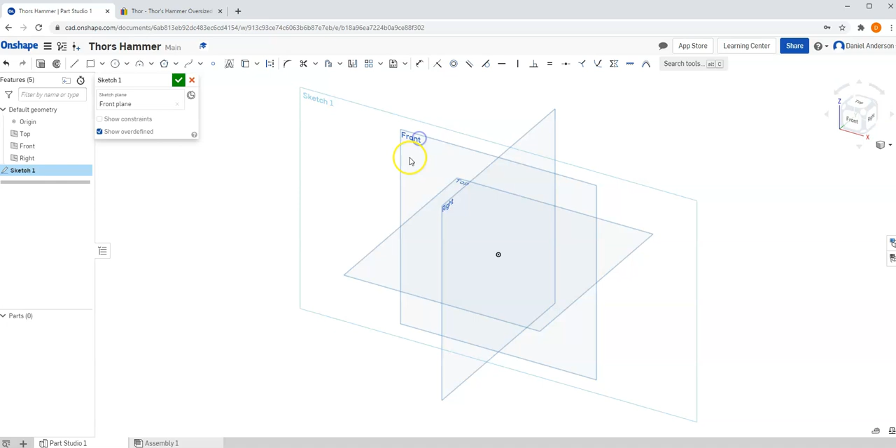And once it's open, let's go to Sketch on our front view. We'll go to our front view, grab your rectangle tool. I'm going to click on the origin and I'm going to zoom pretty far out here because I want this to be a pretty big rectangle. I want the height over here, the top to bottom, to be more than 6 inches, and I want the width to be more than 10 before I click.

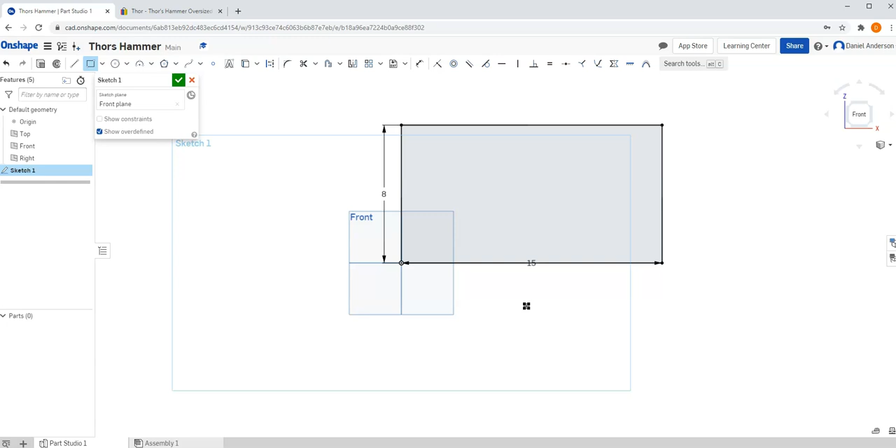And it's asking me for the width, and so I'm going to type in 15 inches. Hit enter, and now it asks me for the height. I'm going to type in 8 inches and hit enter. And you can always go in and add the dimensions after the fact if you missed them in the beginning when you were typing them in.

But once you have your rectangle sketched, go to Finish Sketch, go to your home view, hit Extrude, and let's extrude this rectangle out 8 inches. Hit OK. And now you can see we sort of have the general outline of this hammer, but you'll notice that it has these slants on the corners. These slants are called chamfers, and what they do is they sort of flatten out or slant a sharp edge.

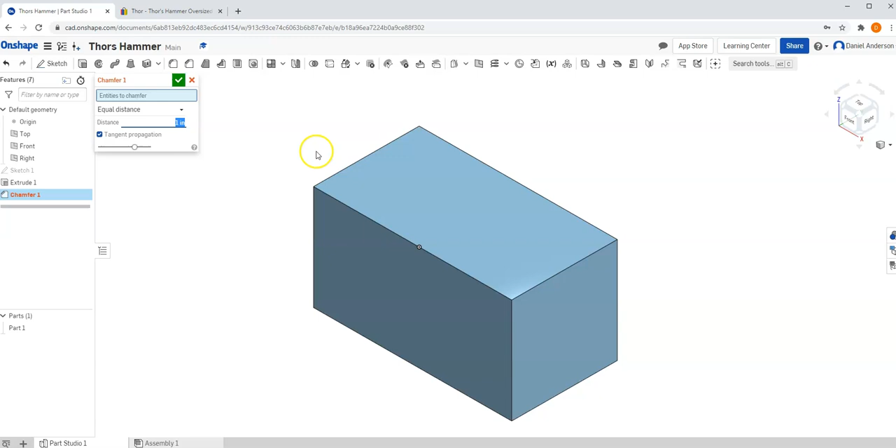And so if we look in our toolbar, we can find the chamfer tool. It's right here. If you click on it, we can tell it to be a distance of 1 inch and hit enter. And I want to click on these 4 outer corners. And so I'm going to click on this corner and this corner, and I'm going to turn it around to the other view to get this 4th corner. Hit OK. But if we look, there are more slants right here on these edges.

And so if we go in, well, actually, if I look, I'll notice that these slants are actually a little bit bigger than these ones. And so I'll make these chamfers even bigger. So I'll click on my chamfer tool again. And this time I'm going to tell it to be 1.5 inches. And I'm going to click on these 4 corners on this side. So this one, 2, this one over here is 3, and this one over here is 4.

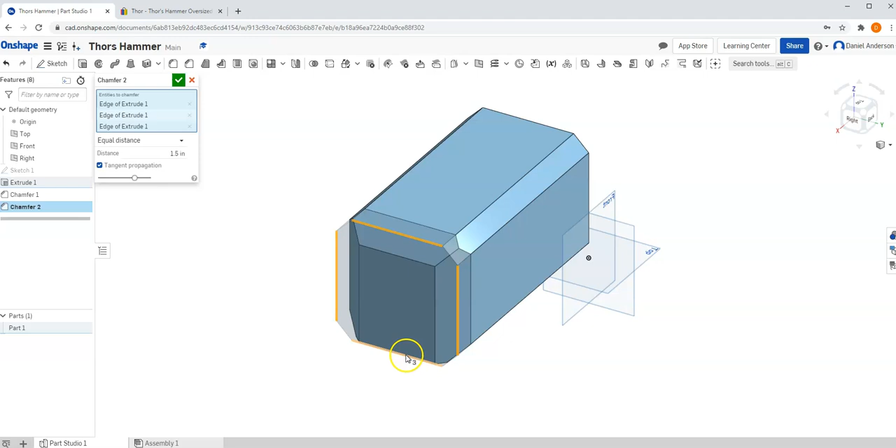But if you look, it's the exact same on the opposite end. It's sort of a mirror image, and so we can go to the other side. So we'll change our view all the way over here, and we'll do the same thing on these 4 edges. So that's 5, 6, and if you're wondering where I'm getting this, where it says 5 plus, it counts for you how many you have down. And so this is the 8th. We've got all 8 of these corners done.

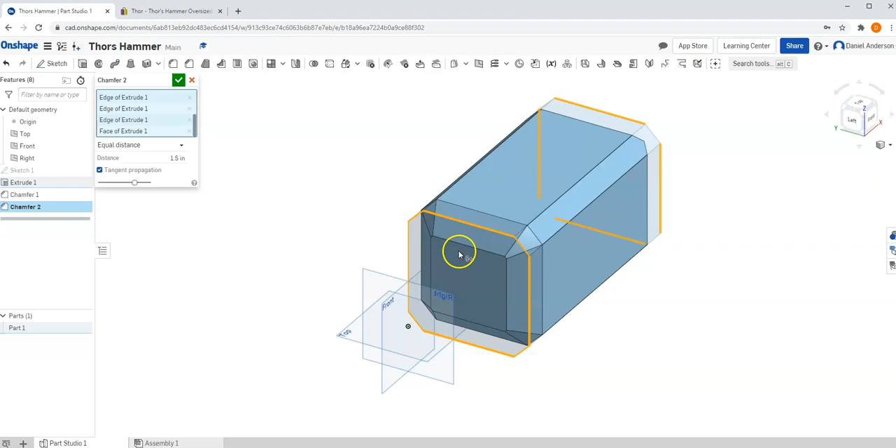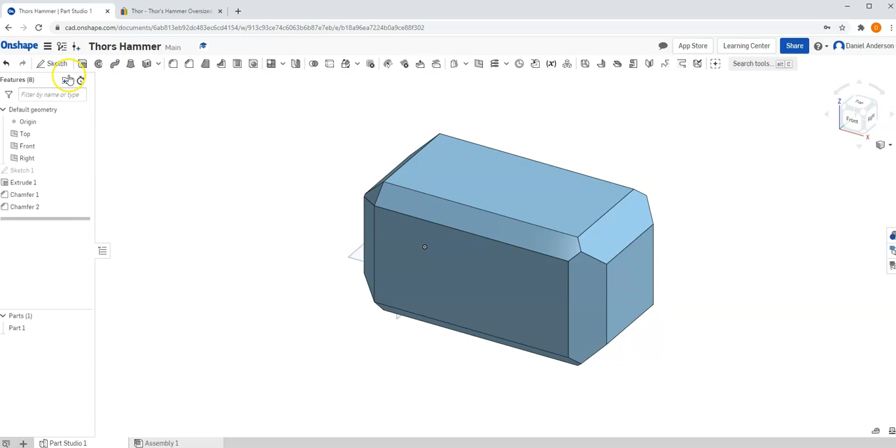I'm going to hit finish, and now you can kind of see how we have this sort of general outline of Thor's hammer. We need to add this circle right here, and we need to add this handle. And so I'll start with this handle right here. I'll put it on this top face. So let's hit sketch and then click on this face. And then let's change our view so we can see what we're looking at here.

And I'm going to grab my circle tool. And I'm just going to put it down somewhere in the center. And click. And I'm going to give this circle a diameter of 1.2 inches. And I want to center this circle. And to center it, I'm going to use dimensions. And you may recall the entire depth was 8 inches.

And so I'm going to click on the center of my circle, and I'm going to go not to this line right here, but to this outer line, this bottommost line. I'm going to click, and I'm going to drag and click again. I'm going to tell this to be half of 8, which is 4 inches.

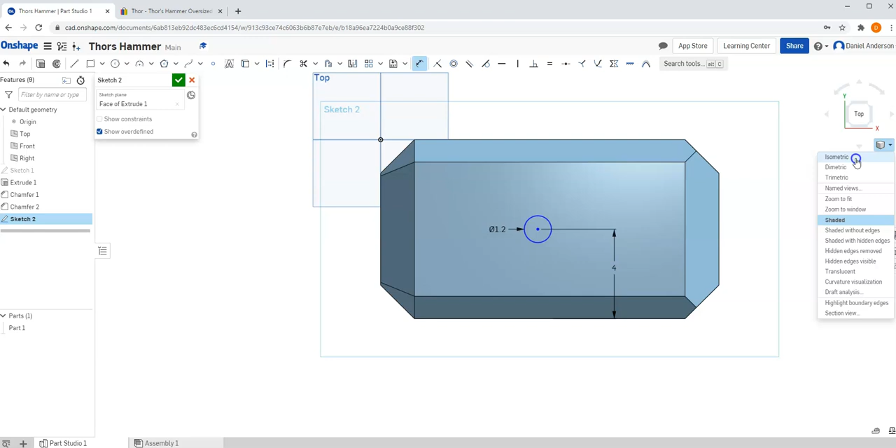And if you're wondering why I went to this line instead of this one, if I go to my home view, you can see this was the edge that we actually measured from end to end. This is 1 inch closer. We would have had to do math to center it from this edge.

So it saved us a little bit of math to not measure it from this edge, but rather the original edge before the chamfer. And so if I go back to my top view, we can do the same thing. Don't go to this edge, go to the outermost edge. We'll click here and click on the center of our circle. And this time it's going to be, if you recall, the width was 15 inches from end to end. And so we're going to do half of that.

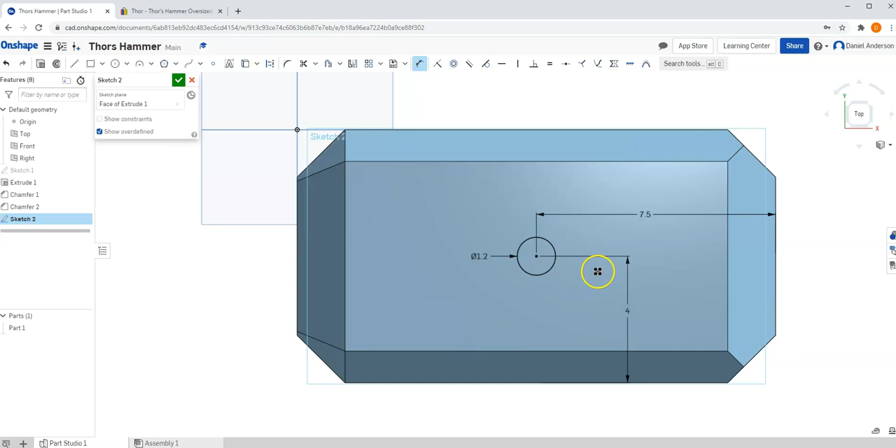And if you're bad at math, Onshape will actually do it for you if you type in 15 divided by 2 and hit enter. And it'll figure it out. It turns out half of 15 is 7.5. And so now I have a fully centered circle. I'm going to go ahead and finish my sketch and go to my isometric view.

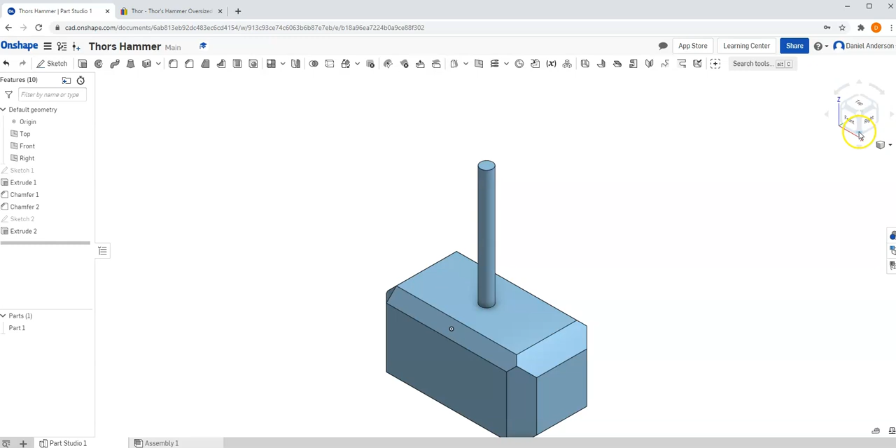And I'm going to extrude this circle. And let's extrude it 12 inches. Hit enter. And OK. And there we go. We have that handle. And so now all we need to do is add these circles on the other end. And so we need to go to the other end of our shape. I'll change my view in my view cube.

And so I want to start a sketch on this face. And if I look at it from the bottom, we can start working. I'm going to grab my circle tool, but instead of measuring it and centering it, I'm going to show you a new trick. So let me actually change the view back to isometric. And instead of drawing a circle, I'm going to find my project geometry feature. I'm going to select it, and I'm going to click on this centered circle that we drew before.

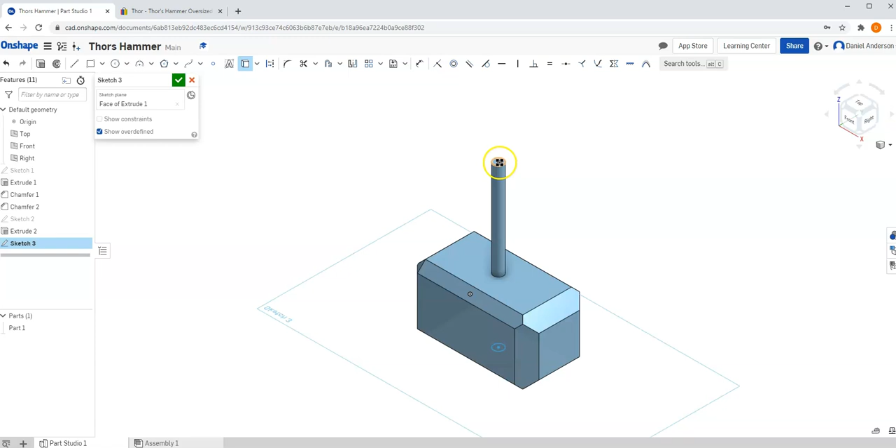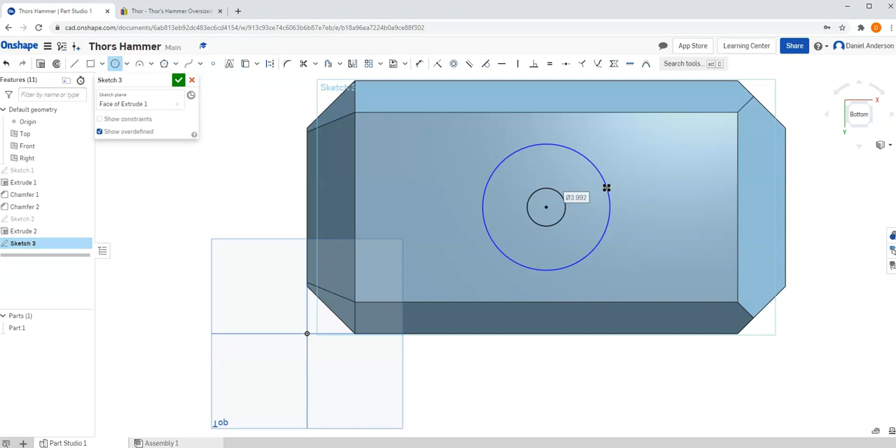And if I click on it, you'll notice what happens is it projects that shape onto the sketch plane that we're working on now. And so now we have a completely centered circle, which we can use to center our next circle. And so I'm going to grab my circle tool again and have it have the same center as the previous circle and drag it out. And I'm going to give it a diameter of 4.5 inches and hit enter.

Next, I'm going to finish my sketch and click on the corner of my view cube to change my view. Hit extrude. And I want to make sure I get both circles, not just this outer one, but also this inner one, so it all comes out as one shape. And I think I want to tell it to come out, let's say, 0.125 inches. And hit enter. And it comes out just a little bit.

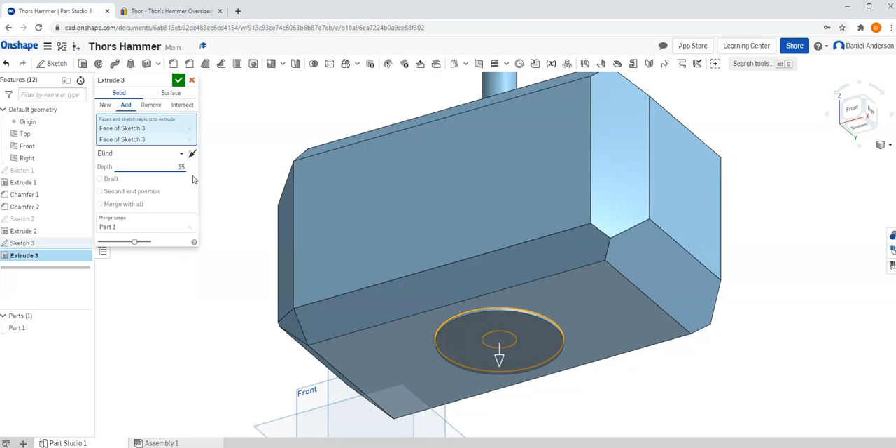And if that's not enough, we can tell it to be a little bit more. We can tell it to be 0.15 inches if we want it to go a little bit further out. And then hit check. And if we look, there's actually a smaller circle that also extrudes out, so we can grab that as well. That's pretty easy. We'll start a sketch on this plane. Go to our bottom view.

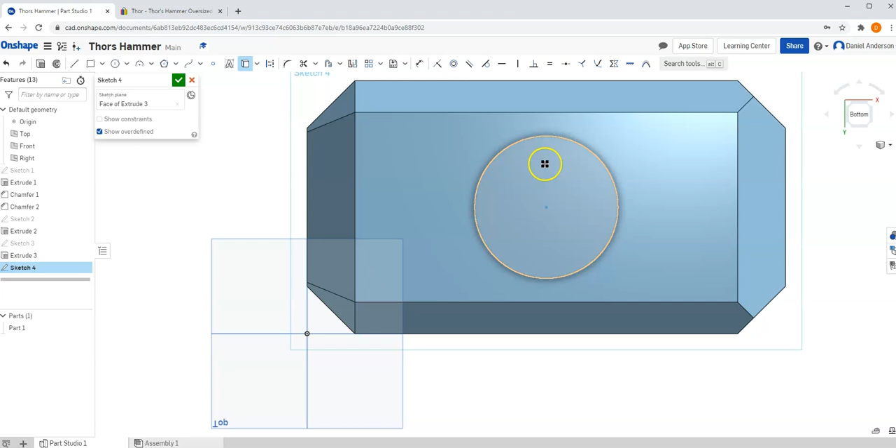And again, I'm going to use my project geometry tool so I don't have to recenter a circle. I'm going to click on this previous circle to use its center, grab my circle tool, make it coincident with the previous center, and I'm going to tell it to be just a little bit smaller than the previous one. I'll click and say 4 inches this time, just so it's a little bit smaller. And I'll finish my sketch.

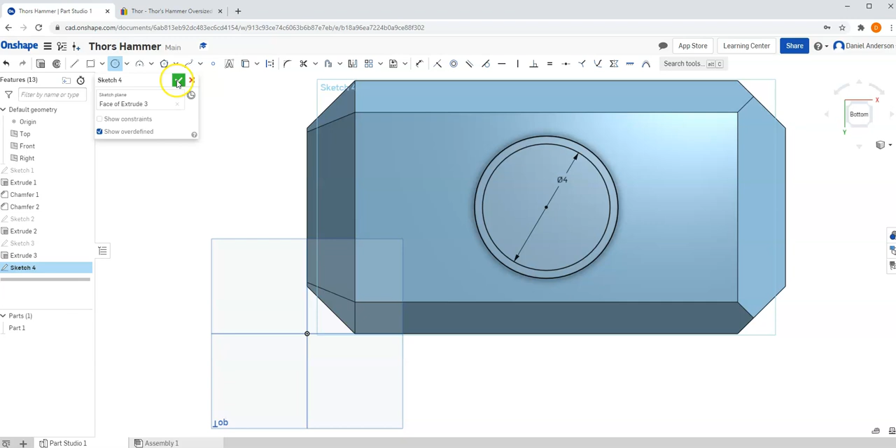I'll change my view to this corner so I can see what's going on. Hit extrude. And I don't want to click on this outer circle. I want to make sure I click on the inner circle. It is possible to click on the outer circle, and you'll see what happens. It sort of creates this O-ring on the outside.

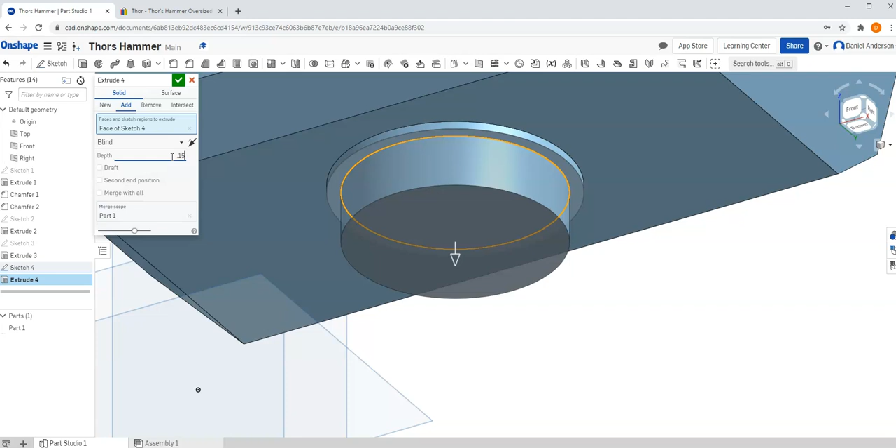I'm going to hit cancel, hit extrude again, and this time I'm going to make sure I click on the inner circle. And again, I'm going to tell it to go out 0.15, I believe is what I used last time, and hit enter. Hit finish sketch, and there we go. Now we have Thor's hammer.

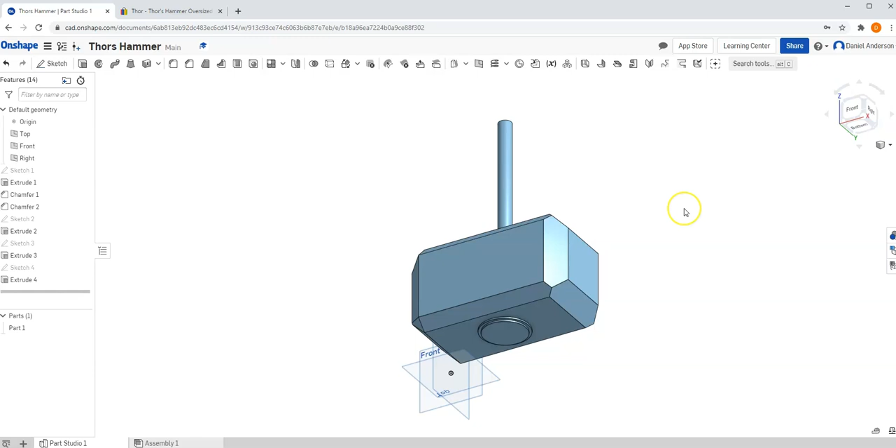And if you want to play with it a little bit more to make it look a little bit more like Thor's hammer, try to add some more of the features or some of the colors to it. You are more than welcome to. So have fun with it, but we are finished with this shape.